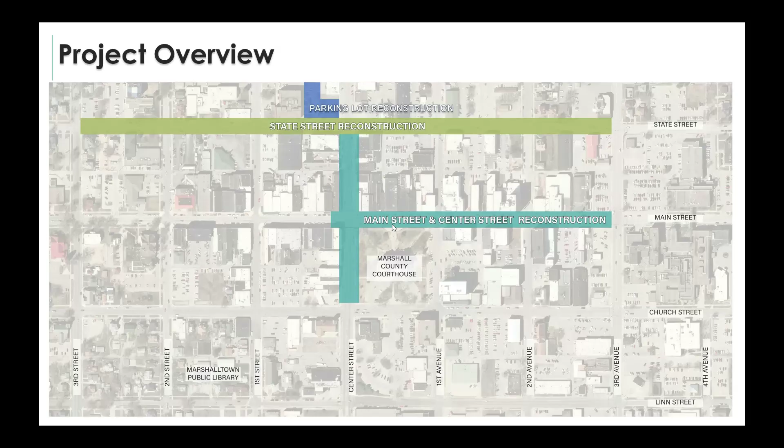You may have a question of what's included with this project, what are we doing. We're going to be doing full street reconstruction, brand new pavement on the entire roadway. We're going to be doing brand new utilities, including new water main and new storm sewer, which I'll get into a little bit later. We're going to have new streetscape amenities: pavers, street trees, site furnishing, a really cool gateway monument arch, and expanded roadway lighting. We're going to increase pedestrian lighting throughout the corridor, and we're looking at expanded parking throughout the corridor, gaining more parking stalls through both parallel and back-in angle parking.

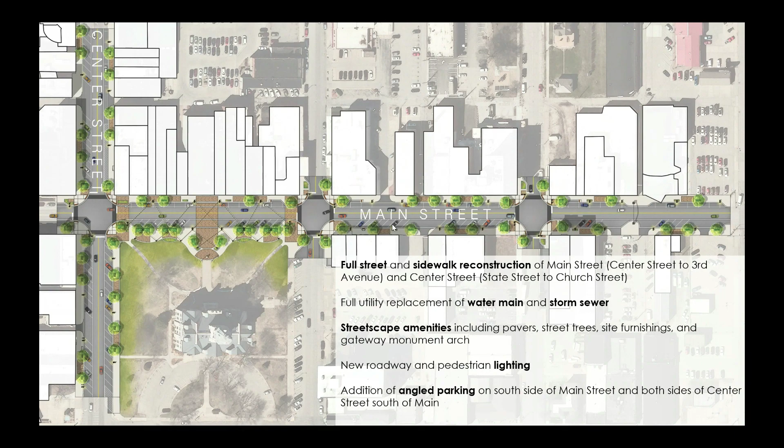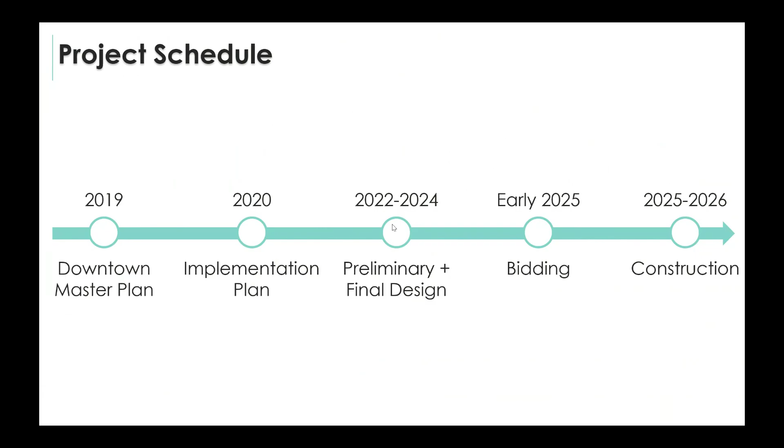One of the things we're going to spend a lot of time on is phasing. What does this project look like and how are we going to build it? We're looking at three major phases for our project. We're anticipating the project will take two years, all of '25 and all of '26, so we're clear up front that we anticipate this to be a two-year project. So what's going to happen year one and what's going to happen year two?

We're going to have that broken up with an initial subphase. The intersection at First Ave is the very first thing the contractor has to address. They can take down or start to remove pavement in the whole block on both blocks, but they have to get that intersection opened up as fast as they can. That's going to be their priority, because we don't want two intersections down all summer. We only want a short period of time where First Avenue is down, and then we'll continue on. So once again, to set expectations up front, we do anticipate a two-year construction process.

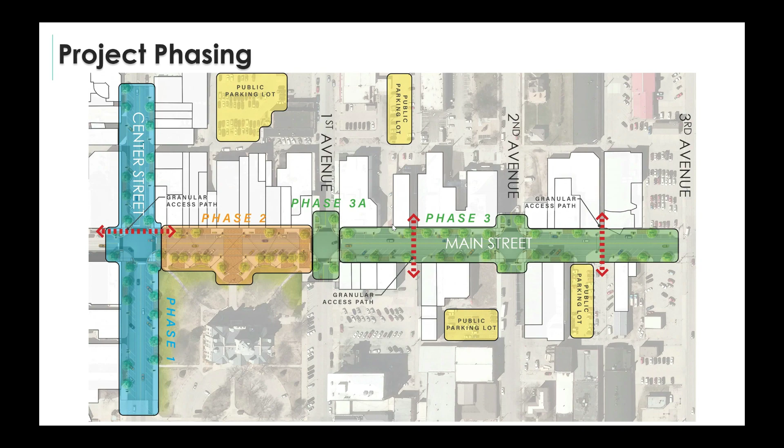Our plan is, if you imagine when you walk out of your building, you're going to walk out and there's going to be a fence about six feet in front of you, running the entire length of the property. We're going to have a pedestrian path so pedestrians can park on the ends of the block and then walk and get to every one of your businesses. Whether it be a fence like we showed here or some sort of barrier, we're not sure exactly what that is, but there will be a barrier there.

What we'll do is tell the contractor, okay, you can work in between those fences. You can tear your road out, you can do all your utilities. They can do tons and tons of work while we're still able to maintain access to these businesses, which is the most critical thing for us. We want to make sure that everybody is able to get into their business as much as possible and able to function.

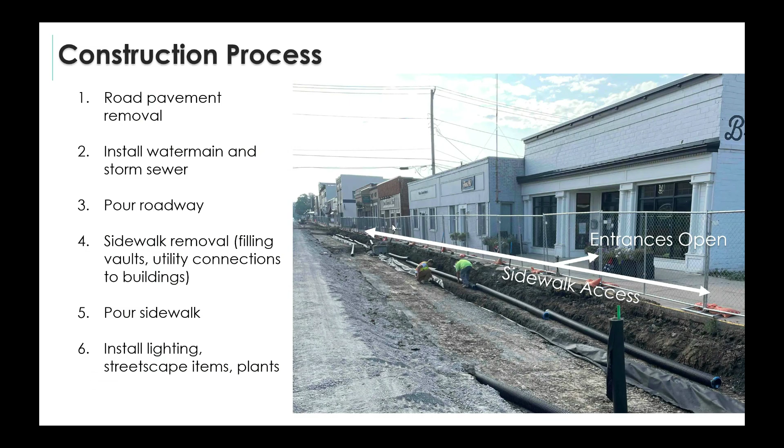So one of the things we also know about construction, as we start to think about those entrances and what they're going to look like, is that construction is not a clean process. We know it's going to be dusty. We know there's going to be a lot of dust in the air and some extra debris.

One of the things the city learned through their process with their entrances is that even just having extra rugs, being able to have an extra carpet when people walk in, starts to protect your flooring a bit. Maybe some extra vacuuming, maybe a shoe cleaner. There's some stuff we just have to work together on because we have to understand it is going to be dusty. We'll be working with our contractor to wet it down as needed, but there's only so much we can do, and we know there's going to be some.

I know the idea of reconstruction isn't fun, and we heard a lot of questions during State Street about why it's taking so long. What's actually going on? Why does it feel like they're digging in the same place three times? Sometimes they do because of the different processes. So I want to walk through a little bit of the construction process at a high level so we can keep moving. I could talk forever about construction, but I'm going to limit that.

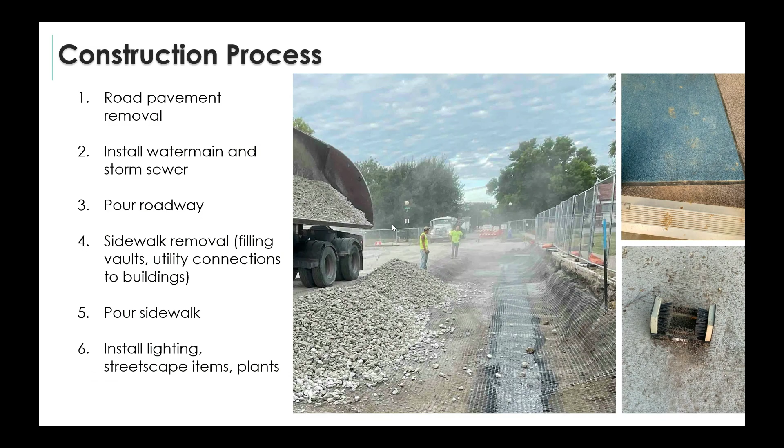The very first thing we'll do is come in and put those fences up. Our contractor will take all the pavement out. Then we're going to look at the water main. The water main in the ground on Main Street is older than everybody in this room—it's over 100 years old. It has reached its life expectancy and needs to be replaced. So that's the very first thing we'll be doing, really looking at that water main.

As a quick reference back to State Street, on parts of that project we actually had 3 water mains we had to work around, ranging in size from 4-inch to 16-inch. The contractor has to be able to put that new line in while keeping all those existing lines live and active.

I want to graphically show you what that looks like and how we do it for a water main system, specifically looking at Main Street. The nice part about Main Street is we only have 1 water main, not 3 existing ones, so we have a little less to work around.

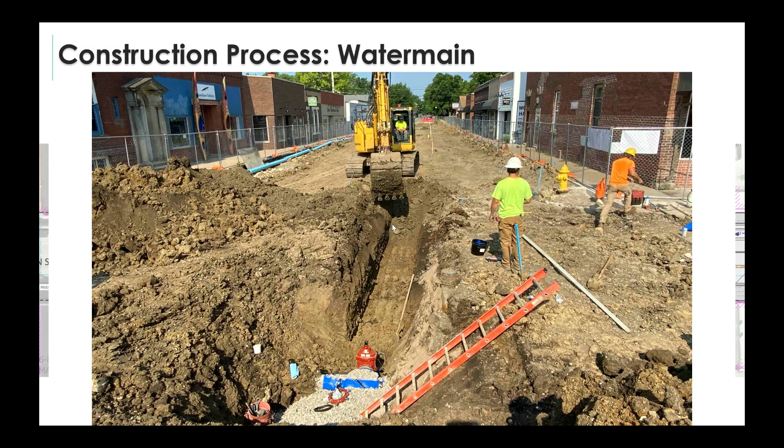The first thing to think about is: if you're a water valve that's been in the ground for 100+ years, covered in dirt, are you going to work? We don't know—we're hoping you do, but we need to be prepared if stuff doesn't work, which means using specialty processes to connect to that existing water main and keep things going. So this is kind of an overview of our project.

Over the next couple of weeks, the contractor has to put all the brand new water main in while avoiding the existing water main, existing storm sewer, and other items. Once that's in, we have to make a connection to the existing water main on the other side—does that valve turn? We're probably going to need that specialty company to come in and make that connection again.

Then we have our water main in, and we have to test it. We have to make sure the water is clean and safe, because obviously we were just in a mud hole or a ditch. That testing takes 3 or 4 days to go through.

During those 3 or 4 days, it may seem like nothing's going on because we're waiting for test results to come back. Let's say we get those results back and everything passed—we're nice and clean.

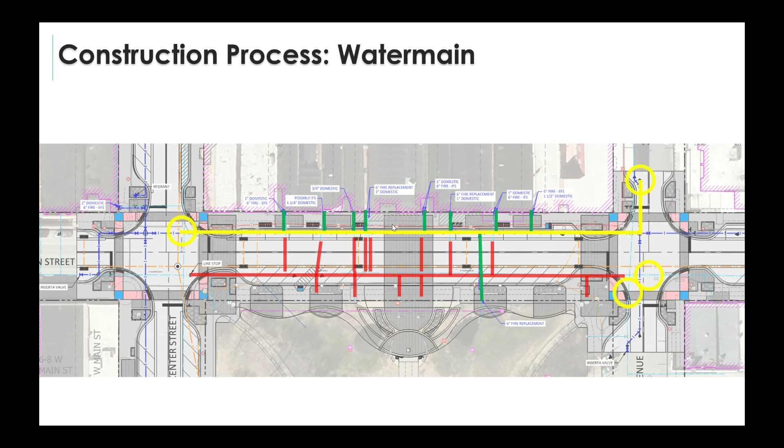So next process: once the water main's in, then we move on to storm sewer.

Storm sewer should go a lot faster since it's pretty easy, straight digging. One of the things we're doing is expanding storm sewer. If you drive downtown, there's not a lot of storm sewer, not a lot of intakes and capacity, so we're increasing that and providing additional drainage paths for stormwater.

As we talk about stormwater, we really want to talk about sump pumps too. When we remove the pavement, we've got soil exposed. If it rains, that water goes into the soil and slowly works its way down, and if we get a really heavy rain, that's going to get to your sump pump. So as business owners, we want to ask: do you have a sump pump? Have you checked it? Is it running? We want to look at those things ahead of construction because we're anticipating increased use of sump pumps during construction if we get into a wet period.

We had a stretch on State Street with 36 days of rain this spring, an astronomical amount compared to a normal year, and people's sump pumps were running. So that's something we want to talk with people about: do you have a sump pump, and where's it connected to? We want to make sure we get that connection point. I've been in almost all the basements, so we've got a lot of that documentation, but I just want to have a conversation to confirm, and if you have one I missed, I need to know.

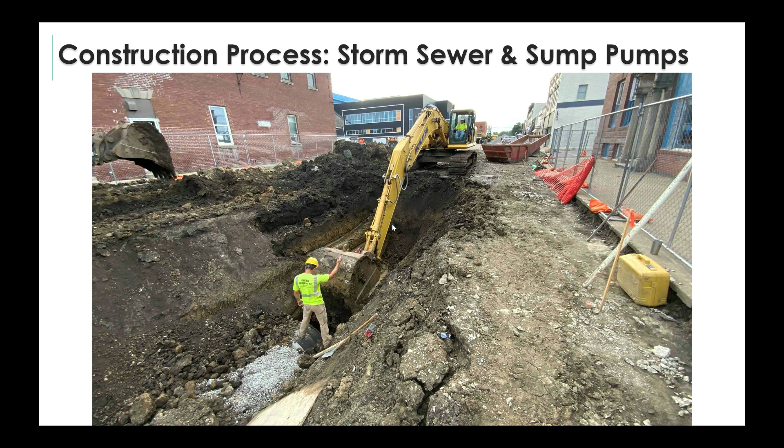Once we've done the storm sewer and the water main, there are still some underground utilities — maybe footing drains, maybe we need to make connections for water services. During those times, this could be one of the first times you as a business owner see a business access closure, because if your water service comes in right under your front door, we can't replace that without impacting the front door. But that'll be minimal impact, and we'll coordinate with you ahead of time to figure out how that's going to go. Once again, if it doesn't impact your business, you'll have access.

After we get done with that work, we want you to keep access. This is a picture from Parks and Rec, just downstairs, where we had to make a connection after we finished. The contractor gravelled it back up and the sidewalk was opened back up. So once we make a utility connection, we put the fence back and set a gravel access path so you continue to have access to your building.

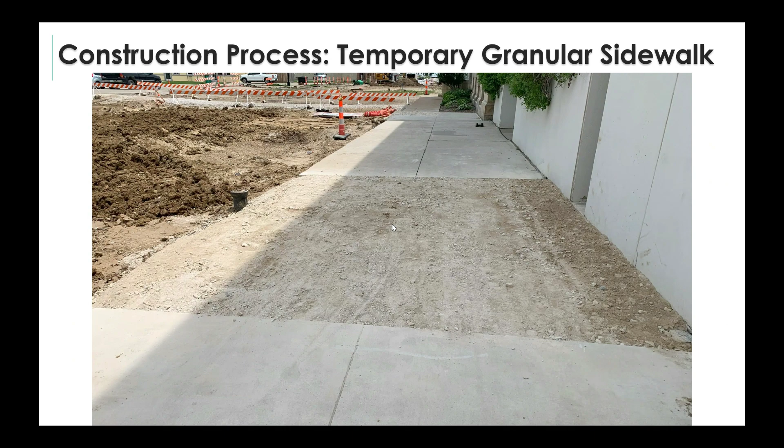Once we've done all the underground work, now we really start to see progress, because a lot of what happens underground you never see again. Next we start to think about putting the road in and setting paving. Our contractor will start grading the dirt, putting rock down, and setting concrete and bringing in the steel we need.

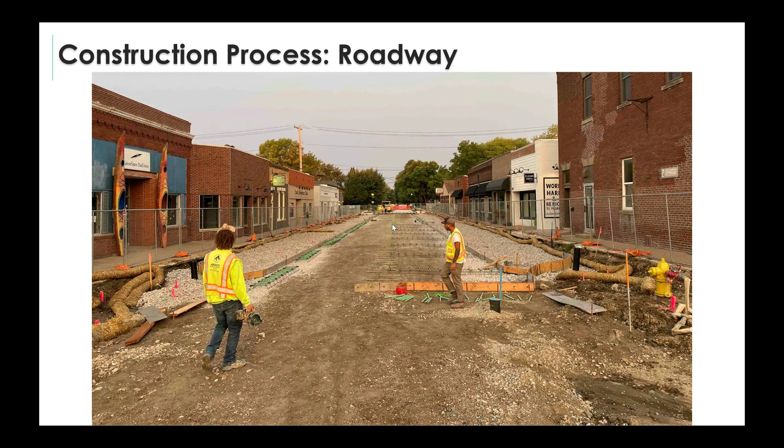On the day we're paving, you're going to see a lot of activity — lots of concrete trucks and concrete crews. That's one of the things we work on with the contractor throughout the process, because they'll have equipment and stockpiles. Where does that stuff go? How do we maintain those areas so they don't impact businesses?

On a busy day we could have as many as 30 people there. Where are they going to park? We make sure we're coordinating with the contractor to tell their staff to park far away or carpool in, so they're not taking up downtown business parking stalls. There have been many mornings where Heather and I have told the contractor to move because they were parked in spots business owners needed to use.

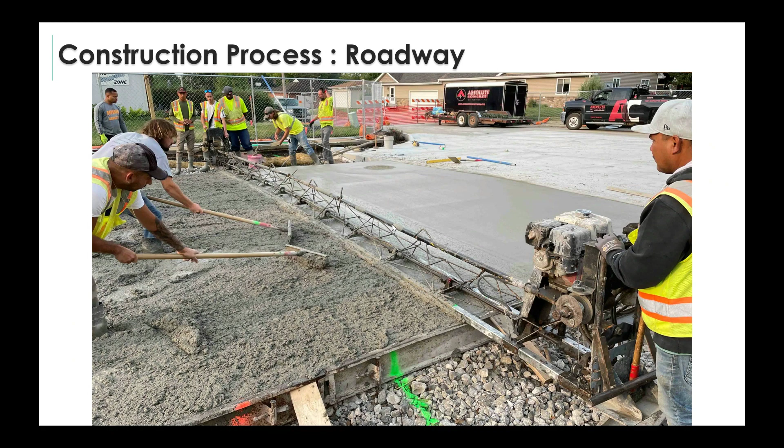So now the road's done. So now we're really going to start to go outside that road and look at that area adjacent to your building and start to figure out how do we replace that sidewalk. The potential slowest piece in this is really if we find vaults. A vault is essentially an underground room under your sidewalk that goes out into the building.

We are aware of five of them on our project. I've been in every basement when we've looked at them, so we're actively tracking that ahead of time. For those, our contractor is going to have to pull the top off, block in that wall going into the basement, waterproof that wall, and then backfill. That's going to take several days to be able to do each one of these vaults independently.

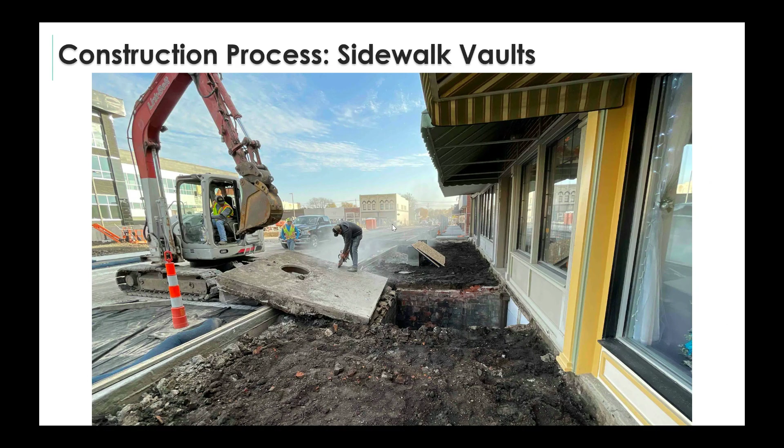So one of the things we want to talk through tonight is the idea of how can we work together and help communicate with everybody. One of the things I wanted to talk through is this is a good example of ways that property owners, through conversations, could help speed up some of the construction.

So this is Main Street. On the left you've got City Centre, 16 East Main, and then the center building is the city's building, and then the next building is the Bowman building, which is 24. Both City Centre and Bowman have large vaults under their sidewalks that we know we're going to have to deal with and address. So there's two different approaches we could take to this.

If the property owner in the middle, let's say it wasn't the city, let's say it was a private business, and they said, hey, we have to have our front door, we have no access in the back, we'll say okay, great, we'll deal with that. We'll do one vault at a time. That way, when we're doing one vault you can access from the east, and when we're doing the other vault you can have access from the west.

The potential where we can try to start to think about ways to speed up construction and make things go faster is if that center property owner says, you know what, I could have access from the back of my building. We're not asking people or telling people they have to, we're just talking about options here. If they said they can access from the back of their building, we could do both those vaults at the same time and shave at least a week or two off of the construction project just by coordinating that. So that's some of the stuff we're going to talk about tonight.

Is there any opportunity for people to use rear access? If not, great, we'll accommodate that, and we've got solutions for it all.

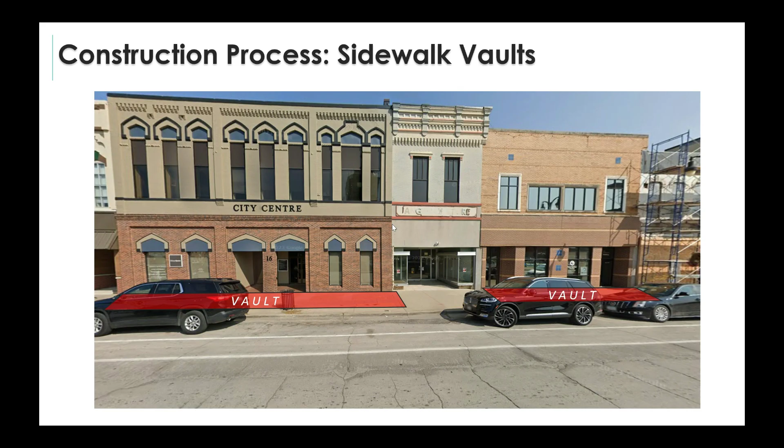So then, once we get those vaults filled in, then we're going to start to pour those sidewalks. And this is really that second opportunity where we're going to see business owners have a short period of time when you won't have access. Obviously, the day before, when they're really prepping that sidewalk, our goal is to work with the contractor and have essentially a little bridge that'll get over that prepped area to keep access.

The next morning, when we pour that concrete, we'll have to obviously not have access to it, and that'll be for about a day. Then after that, we'll open it back up and start to direct pedestrian traffic to you.

One of the things you can notice is that we're not doing a whole block of sidewalk at once. We're going to do it in phases, so that way we're going to limit the amount of impact at a time. We really want to maintain access and keep everybody open as much as possible.

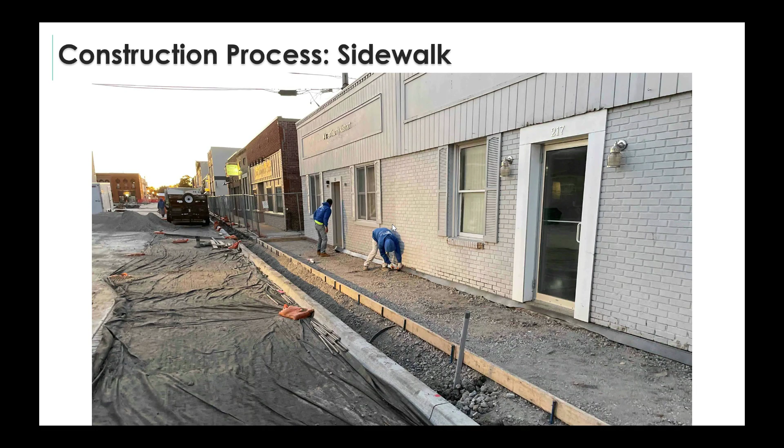So at the end of the day, we know construction is tough. We know it's going to take time and it's not going to be fun. But what we want to think about is how do we get past that, and how do we get to the end of the project? How do we get to a product that's going to look great, that's going to be something Marshalltown can be proud of? It's going to start to draw people to downtown and encourage growth.

One of the things we want to do is I'm going to hand it over to Deb and John to really talk through how the city can help support the businesses during construction and be able to be a help for them as well. I'm going to change the presentation, give me one second.